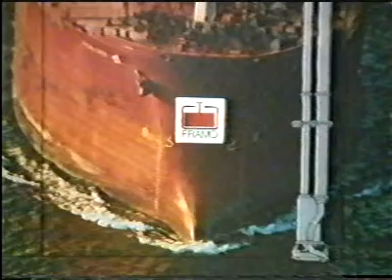FRAMO submerged cargo pumping system for tankers was developed in the beginning of the 1960s and is today in operation on approximately 800 ships worldwide.

This instruction video shows the FRAMO cargo pumping system on board MS Stolt Markland, one of Stolt-Nielsen's 4 new buildings at Kleven, Florø, Norway.

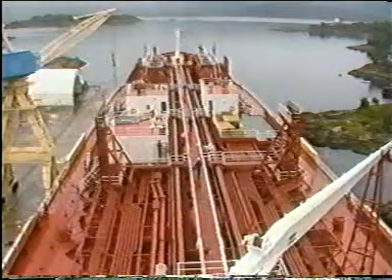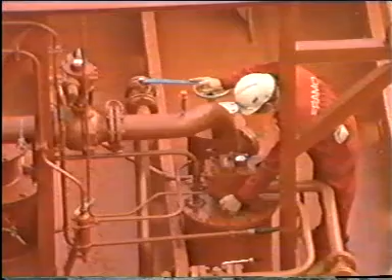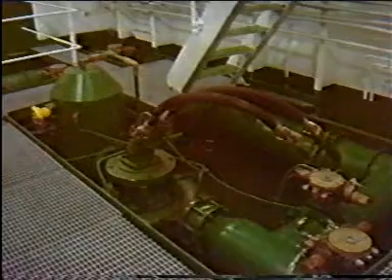The ship is a 29,999 tons deadweight chemical oil product tanker, fitted with 39 FRAMO stainless steel hydraulic-driven submerged cargo pumps, type SD-150, two submerged pumps type SD-100 for deck tanks, one FRAMO portable cargo pump, two FRAMO ballast pumps, as well as bilge pumps and fuel oil transfer pumps, all driven from a centralized FRAMO designed hydraulic system.

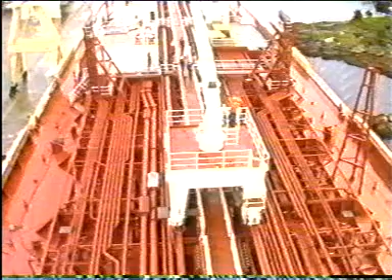The hydraulic system is also driving the deck machinery. The ship is also equipped with a vapor return line for safe cargo handling.

Operation of FRAMO cargo pump. This video will highlight operation of FRAMO cargo pumping during loading, discharging, stripping, and tank washing. Furthermore, 10 important rules for preventive maintenance.

Loading the ship through the cargo pump. The FRAMO cargo pump can also be used as a drop line.

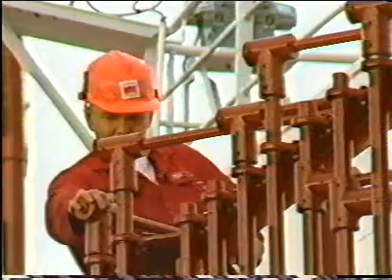To avoid pressure peaks in the pump housing and pipe stack, it is very important to start the loading slowly with the cargo valve only partly open. This will also reduce the mixing of air into the cargo in the tank.

When the cargo pump's discharge line is completely filled, open the cargo valve to maximum open position. Remember, maximum loading pressure is 8 bar at the pump's top cover plate.

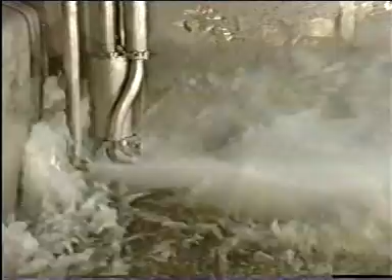Also, when using a separate drop line, as we have on this ship, we recommend to start loading slowly through the pump only, until the level is above the drop line outlet, or after the so-called 1-foot sample is taken. We normally recommend to open up the drop line valve and continue loading through both the pump and the drop line.

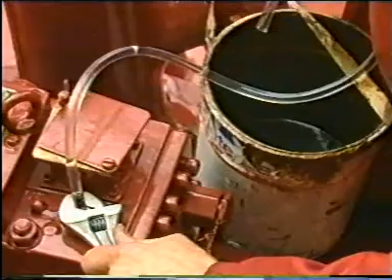Discharging, starting and running of FRAMO cargo pumps. It is assumed that the hydraulic system is vented and free from air, that the cargo pump's cofferdam is purged, and that the hydraulic oil temperature and main system pressure is correct.

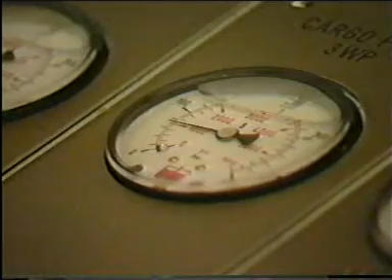If the oil temperature is below 30 degrees Celsius, circulate the oil through the heating valve. One: start the cargo pump, moving the control handle slowly until the pump starts rotating, and run with hydraulic pressure 30 to 50 bar for about 2 or 3 minutes. Keep the cargo valve closed.

Two: raise the cargo pump pressure to above shoreline pressure before opening the cargo valve, to avoid backflow over pumping.

Three: also open the stripping valve between pump and discharge line. Keep the stripping valve open for approximately 5 minutes to get rid of the air pocket or gas pocket trapped in the stripping pipe. This is to avoid pulsation and vibration in the cargo pump.

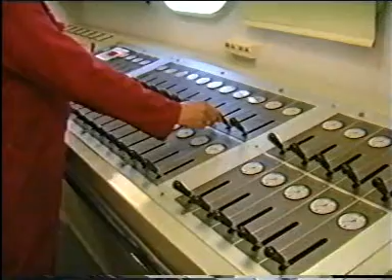Four: follow the same procedure for cargo pump number 2, 3, 4 and onwards. Be sure that enough hydraulic oil is available for the cargo pumps. If not, the cargo pump speed will drop and capacity head will be reduced.

Five: the shoreline back pressure will increase when more cargo is pumped through the line. To clarify the above, we have to look at the performance curve for the cargo pumps.

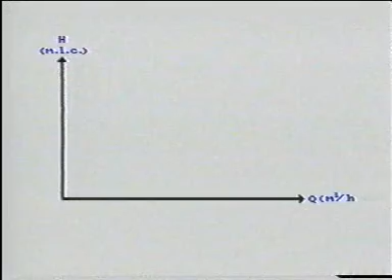This is a typical performance curve for one centrifugal cargo pump. We have the pump capacity in volume per hour this way, and the discharge pressure in meter liquid column this way.

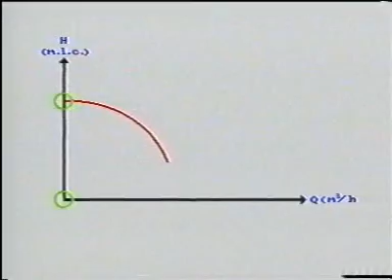Maximum discharge head gives minimum pumping capacity. This is the height we are going to lift up the cargo to, called static lifting head.

When starting yet another pump, the capacity will not increase because we have reached the maximum delivery pressure, and the pump should be stopped because it is only wasting energy.

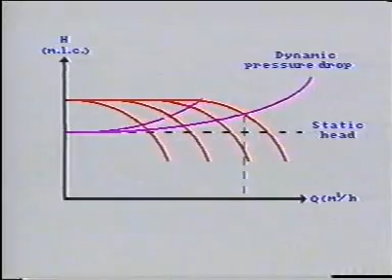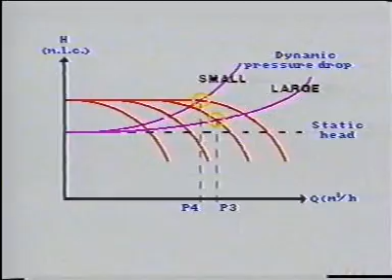So the rules for parallel pumping are: start the number of pumps until you reach maximum allowed pressure in the shoreline. This is often the normal discharge situation.

Start the number of pumps until you reach the cargo pump maximum head. If the manifold pressure does not rise, it is no use to start more cargo pumps.

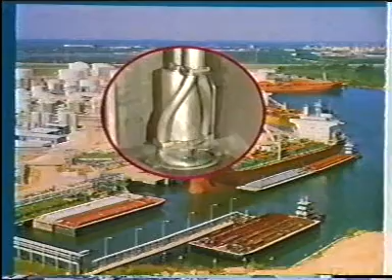Combination of big pumps, high capacity, low discharge pressure and cargo with higher vapor pressure increases possibilities for cavitation at low tank level, leading to vibrations and possible damage of the cargo pump.

If the cargo pump starts vibrating and/or cargo pressure and/or hydraulic pressure starts pulsing, open the stripping valve for some minutes. If the vibrations or pressure pulsing continues, the pump is cavitating and the capacity must be reduced by A.

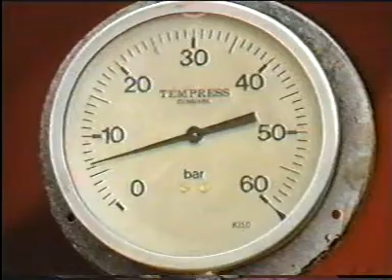Reducing pump speed, or B: increasing discharge head by throttling the cargo valve, or C: reducing pump speed in combination with B. Generally, pump capacity should be controlled by the pump speed, not by throttling the cargo valve.

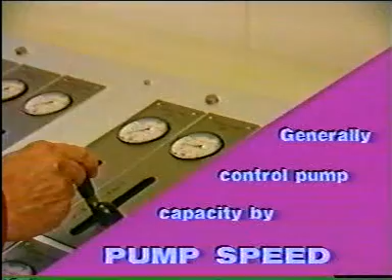Always reduce cargo pump speed or capacity if the pump starts vibrating, especially at low discharge heads. Stripping: when the cargo tank is nearly empty, we are in the stripping condition.

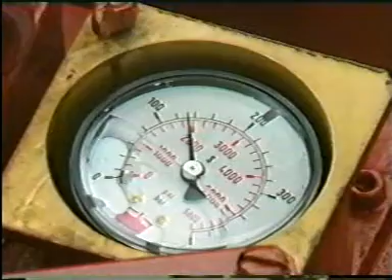Reduce the pump speed when the pump starts to cavitate or lose suction, indicated by vibrations and/or hydraulic pressure pulsations. Empty the tank at reduced pump speed, that is, reduced pump capacity. Throttling of the cargo valve may improve the stripping results.

When the cargo pump sucks air, close the cargo valve. Start stripping of the cargo pump by opening the stripping valve with air or inert gas connected.

Always strip against the lowest possible back pressure. Cargo pump speed during stripping depends on discharge line back pressure and the purging medium pressure.

If the pump speed is too low, we might blow the cargo through the pumping impeller, or if the pump speed is too high, the losses at the wear rings will increase. Or, in the worst case, you might even pump the cargo back into the air inert gas line. The ideal stripping speed must therefore be based on experience on board.

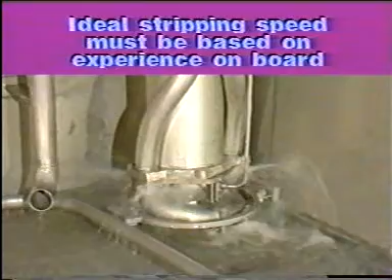Purge until air breaks through the impeller, indicated by a booming noise in the cargo tank and a hydraulic pressure drop.

It is essential for the stripping result that the cargo valve does not leak and that the pump's wear rings are in good condition.

Close the stripping valve. Stop purging and stop the cargo pump. Check the pump's cofferdam.

Tank washing: to avoid dry running or cavitation of the cargo pump during tank washing, reduce pump speed to match the tank cleaning machine's capacity. Flow into the tank and flow out of the tank must be equal. Remember to flush the pump with fresh water if seawater has been used for tank cleaning.

Discharge of cargo heated by deck-mounted heater. When using FRAMO pumps for circulating cargo through deck-mounted heaters, heating should be stopped during discharging.

A normal cargo temperature drop will be approximately 1 to 2 degrees per 24 hours, and the corresponding increase in viscosity will not cause any problem for the submerged pump.

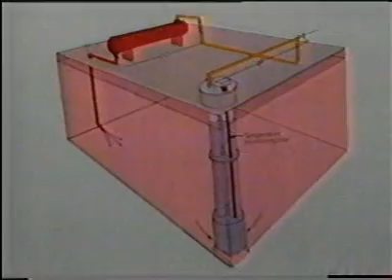Never try to balance heating and discharging by pumping some of the cargo ashore and some through the heater and back to the tank. The efficiency will be extremely low, leading to a drastic increase in discharge time.

10 rules for preventive maintenance. One: purge the pump's cofferdam before and after using the pump. NB: make sure that the cargo pump's cofferdam is open, that is, air is coming out of the exhaust trap.

Two: if air is used as purging medium, drain the airline for possible water condensation regularly. Three: de-aerate the hydraulic system on a regular basis. Avoiding air in the system will increase the component's lifetime.

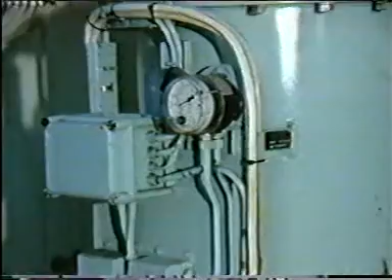Four: check the pressure drop over the filters. Maximum delta P is 1 bar. Five: take oil sampling every 3 months, including particle counting according to ISO 4406.

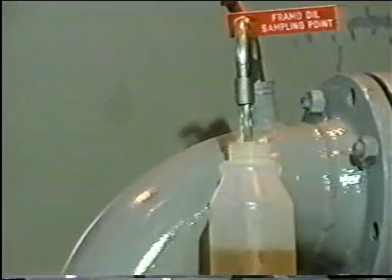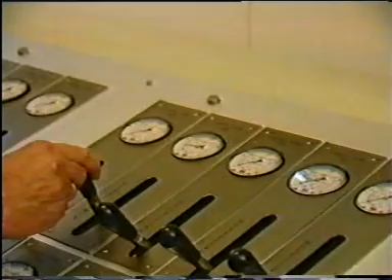Six: never mix the hydraulic oil with other brands of lubricating oil. Seven: to adjust pump capacity, regulate pump speed instead of the cargo valve.

Eight: check the cargo pump's condition against the performance curve once a year. Nine: never start dismantling any cargo pump or other component in the system before you know if, what, and where you have a problem.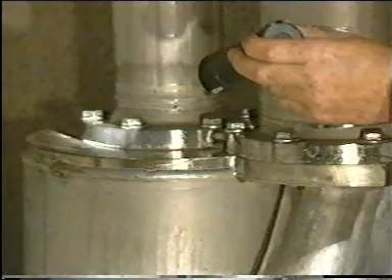Pressure test the cofferdam in order to detect leakages. Ten: cleanliness is absolutely necessary.

FRAMO is located in Bergen, Norway, and has a long tradition as the leading supplier of submerged cargo pumps to the world tanker market. FRAMO's Research and Development Department is working continuously, upgrading the pump design to meet all the newest international rules and regulations.

Before entering the cargo tank for servicing the cargo pump, always close the hydro pressure inlet valve, purge the cofferdam, and be familiar with the ship's safety rules.

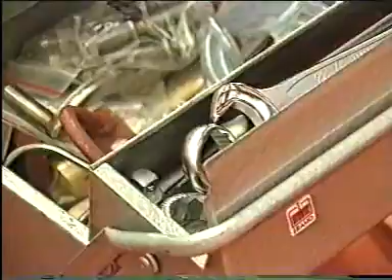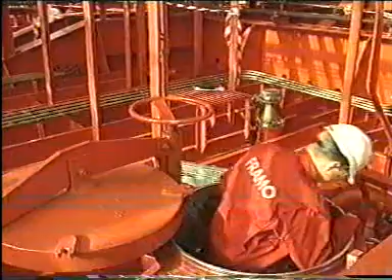Also pick up the number of standard tools you need for the service job from the FRAMO Toolbox. Before you start the service job, study the cargo pump service manual carefully, description and drawings.

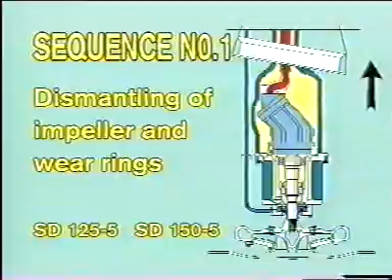We will now show you how to dismantle the new cargo pump SD125 or SD150, design number 5. Sequence number 1: dismantling of the impeller and wear rings.

Start with dismantling of the pump support ring. The pump support ring is a new design, easy to clean, and will also improve the stripping result.

Loosen the bolts, lift and secure the support ring to the pipe stack. Use a rope for securing.

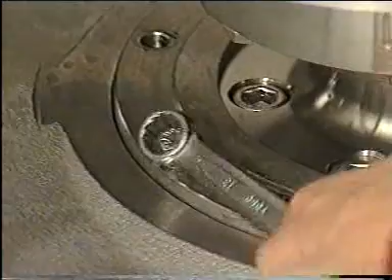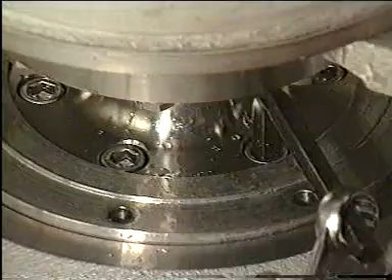Loosen the bolts for the upper wear ring support. Then loosen the bolts for the impeller hub, 2 turns only.

Turn the impeller clockwise for easier access and better working conditions for loosening the bolts. Press down the bolts and pump impeller. When the pump impeller is loose, remove the bolts.

Then remove bolts between the volute casing and cargo leg. Change 2 of the bolts with lowering/lifting bolts, 1 bolt in each leg.

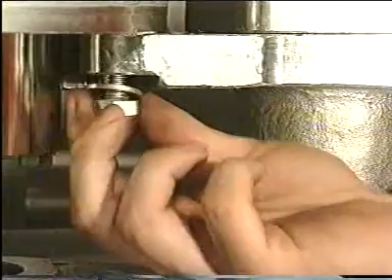Remove the rest of the bolts on the cargo pipe flange and also between the volute casing and bearing housing. Finally, the volute casing, suction cover, and pump impeller are now hanging on the lowering/lifting bolts, diagonally positioned on each cargo pipe leg.

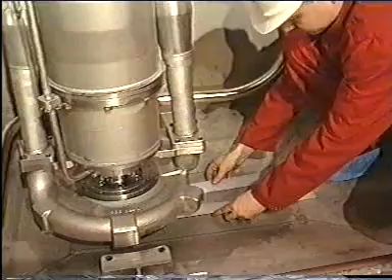To avoid damage on the tank top, use plastic strips when sliding out the unit. Lower the whole unit down carefully. Turn the lowering/lifting bolts in parallel.

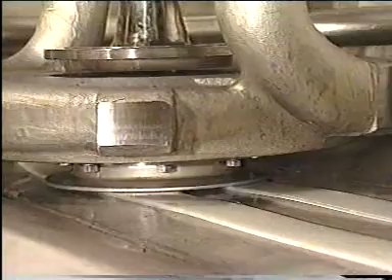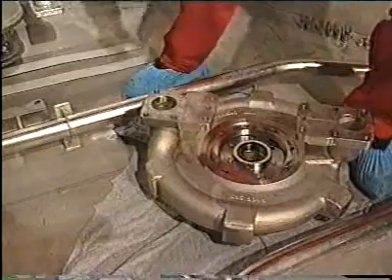Slide the unit out of the well. Remove the upper wear ring and inspect it carefully.

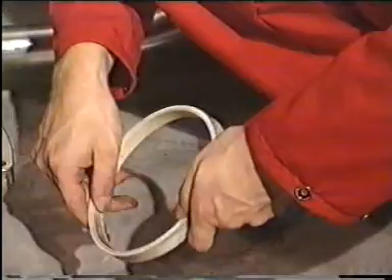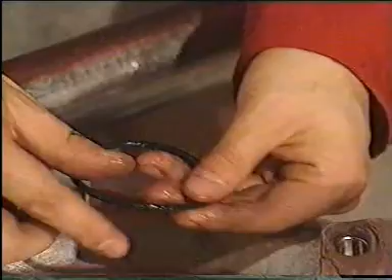Remove the seal element and the O-ring between the impeller and impeller hub. These are normally parts fit for further use, but have to be controlled and cleaned before assembling.

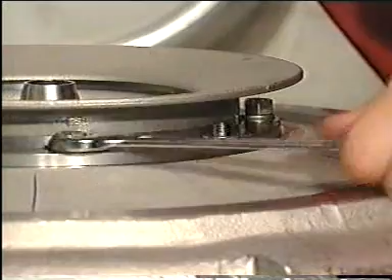The next step is to turn the unit upside down. The suction cover and the impeller can now be dismantled and the parts can be inspected.

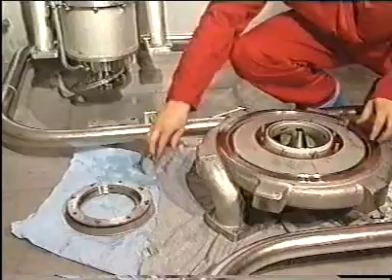Pay special attention to the wearings. Normal radial clearances when new are approximately 0.2 millimeters. We recommend changing the wearing if the radial clearance is more than approximately 1 millimeter.

Loosen the locking bracket and remove the locking ring.

Use the suction bell mouth to lift out the suction cover, and finally lift up the pump impeller.

Changing of wearings is a service job normally done by the crew on board. How frequently depends primarily on type of cargo. Some ships discharging cargo with a lot of sediment may have to do this job several times per year, while others carrying only clean oil products may run for 5 to 10 years before doing any service work on the cargo pump.

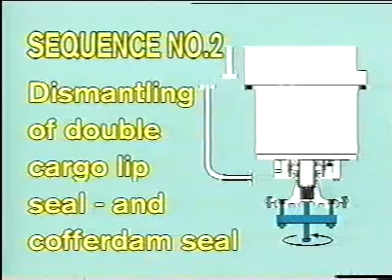Sequence number 2: dismantling of double cargo lip seal and cofferdam seal. First, dismantle the lower part of the cofferdam check pipe.

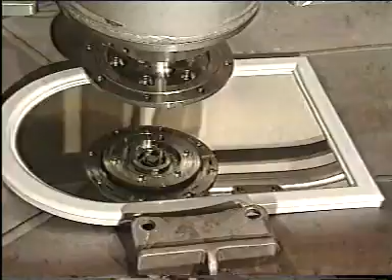Then dismantle the impeller hub from the pump's shaft. For demonstration, we are here using a mirror showing how to loosen the lock washer, remove the bolt, and pull out the impeller hub.

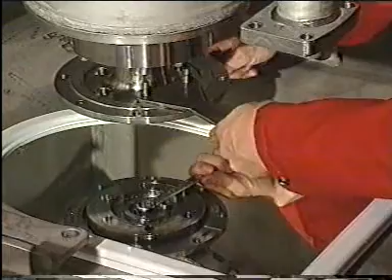The impeller hub is pulled out by using an extractor from the FRAMO toolbox.

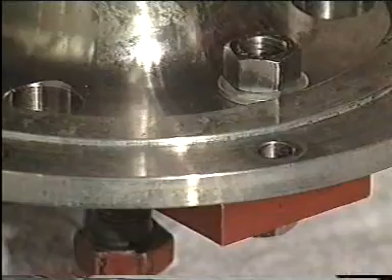Be very careful not to damage the O-rings and ceramic sleeve. Install the assembling cylinder to keep the ceramic sleeve in place and to protect the sensitive lips on the lip seals.

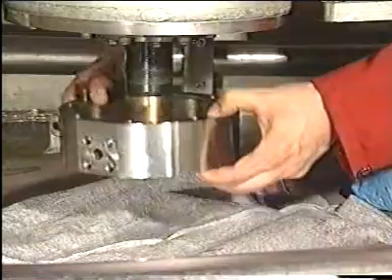Pull down the seal ring housing with cargo seal. The Teflon seal element is sometimes hanging on the bearing housing and must be removed and controlled.

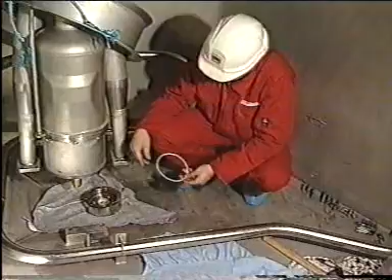Dismantle the cargo seal. Inspect the parts and change if necessary.

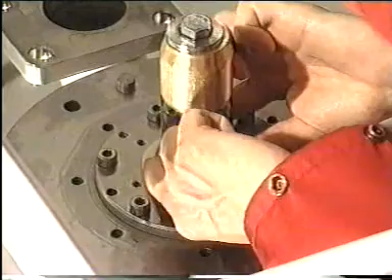The FRAMO single cargo seal must also be dismantled. Changing of cargo seals is also a normal service job on typical wear and tear parts, normally done by the crew on board.

We recommend changing both the single and double cargo seal together, and they are now delivered as one spare part.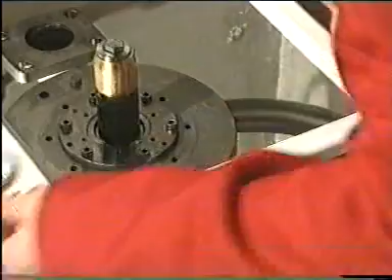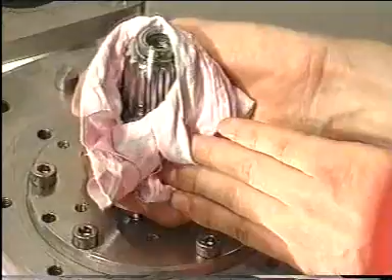Take away the assembling cylinder and pull out the ceramic sleeve and check the parts carefully. The ceramic sleeve must be handled very carefully as it is brittle and may crack if dropped or mishandled.

If necessary, it is also possible to change all rotating parts in the cargo pump when the pump unit is still hanging on the pipe stack.

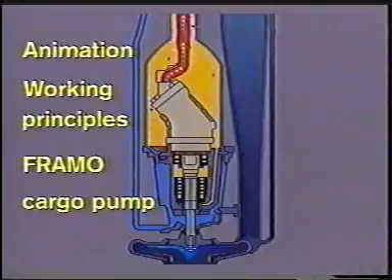Sequence number 3: dismantling of mechanical oil seal or other remaining rotating parts in the cargo pump. The mechanical seal can be dismantled without draining the hydraulic oil from the pump stack.

The easiest way to dismantle the mechanical seal is first to remove the bearing housing from the pump casing. When the unit is dismantled, turn it upside down and remove the upper seal ring housing and then the stationary parts of the mechanical seal.

Use 2 lifting bolts to take out the mechanical seal.

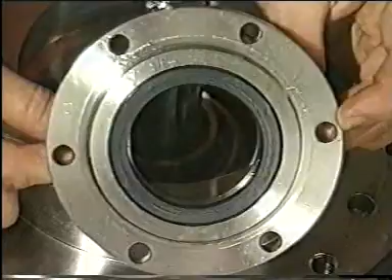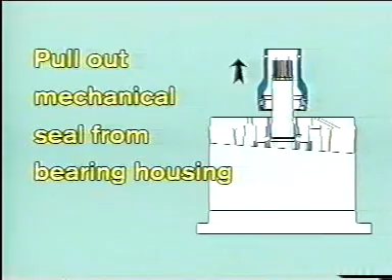Carefully control the stationary part of the mechanical seal and the Teflon seal element. Pull out the rotating part of the mechanical seal by using the special tool from the FRAMO toolbox.

Pay special attention when twisting on the tool for lifting out the seal's rotating parts. Control the seal face carefully. If the seal faces are destroyed, with fretting or grooves in the surface, they normally can be reconditioned.

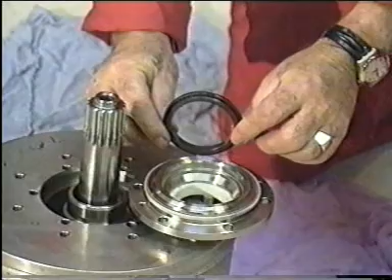Remember, never use grease on the O-ring on the stationary seat. Use soapy water. If it should be necessary sometime in the future to dismantle the pump shaft, ball bearings and backstop unit, this can easily be done by following the instruction in the service manual.

The same applies for the hydraulic motor, but remember, before dismantling the hydraulic motor, you have to drain the hydraulic oil from the pump stack.

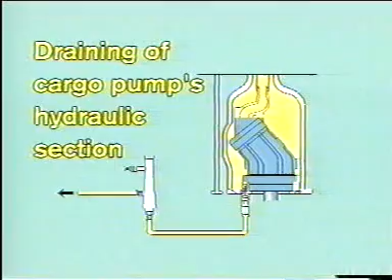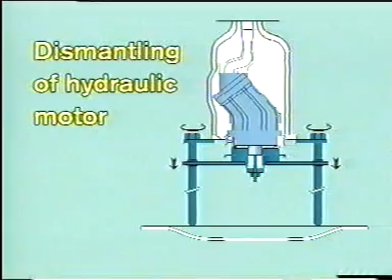To reduce oil spill to a minimum, use the small air-driven drain pump delivered by FRAMO. Then lower the hydraulic motor by using a FRAMO jack, and the cargo pump is now dismantled completely.

Sequence number 4, assembling sequence. All assembling has to be done in reversed way according to the dismantling procedure.

On this pump design, we will ask you to pay special attention to the ceramic sleeve and to the cargo seals. The ceramic sleeve is equal in either ends. To increase lifetime, the sleeve can be turned 180 degrees.

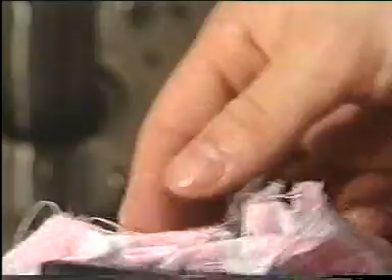The double cargo lip seal must also be installed correctly. On this cargo pump, the 2 springs on the double cargo lip seal are equal - no spring with red marking - but the groove on the seal must be facing down towards the pump impeller.

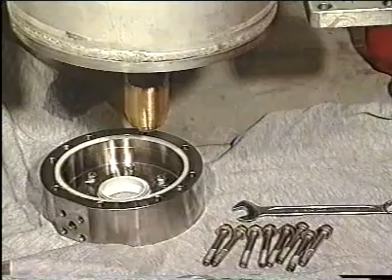Check all seal elements, seal grooves, and seal faces carefully. Pay special attention to the Teflon rings and be absolutely sure of no deformation. Never install a damaged O-ring and be sure of no corrosion, cracks, dirt, etc.

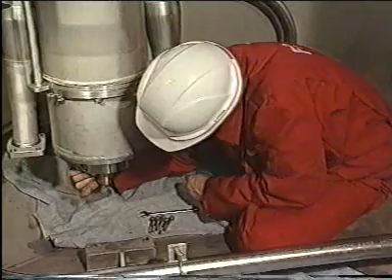And remember, use only genuine spare parts. Also pay attention to how to fit the retainer ring in the right position, at the end of the ceramic sleeve and in position on the splined shaft.

Sequence number 5, pressure testing, test running. After the assembling job is finished, visually check the cargo pump and the cargo tank. No rags or other components must be left in the cargo tank.

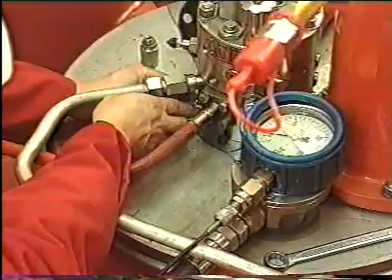Pressure test the cargo pump's cofferdam with 3-bar pressure. The cofferdam must be pressure tested by blinding off the cofferdam vent pipe. Unscrew the complete air relief valve and connect a pressure gauge to the connection.

Connect the air-nitrogen connection on the top cover plate. Increase the pressure to maximum 3 bar and control that the pressure is stable for approximately 30 minutes. Test run the cargo pump, purge the cofferdam, and check that everything is okay.

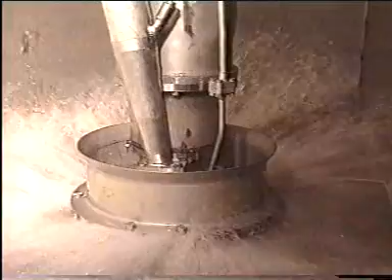If the hydraulic oil in the cargo pump has been drained during the service job, de-aerate the pump stack through the air venting plug on deck before test running. By following these instructions, you will achieve a long-lasting, well-functioning cargo pumping system

and a happy ship for the crew members as well as for the owner.